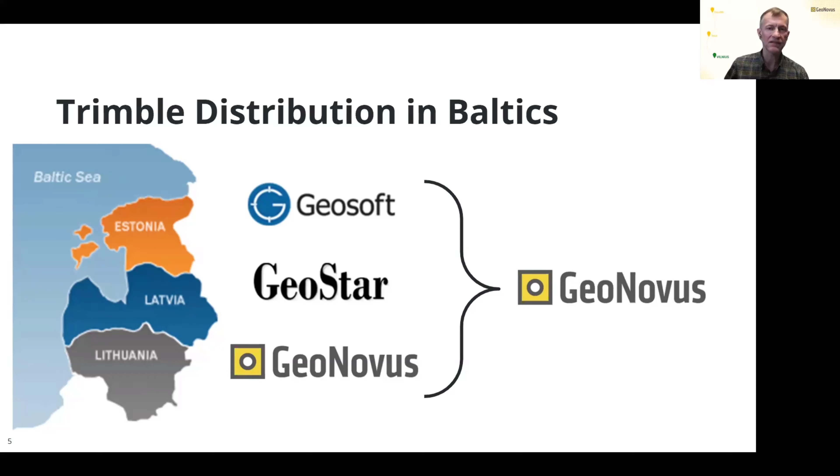And our main mission and role is to distribute and support customers related to the Trimble products, and many customers already know that the main products are GNSS receivers, total stations, classical optical, digital levels, various 3D scanning solutions like Trimble X9, which is used on a tripod, also MX60, which we can put on the train. For example, Latvian railways are using that, or some mobile mapping solutions which are also used in Baltics. So various 3D scanning solutions.

About the monitoring solutions we will be talking today. Christian will help with that. Photogrammetry solutions. Also, we have Trimble Business Center, Trimble UAS Master, some Pix4D products for that. Also drones, various UAS solutions. And in all three countries, we have Trimble repair centers, if somebody needs help to adjust, to fix, to solve various issues for all Trimble products. So in all three countries, we have three repair centers.

And if there is a need, we have various products for rental and can do some projects together with our customers. So generally, from my side, that's it.

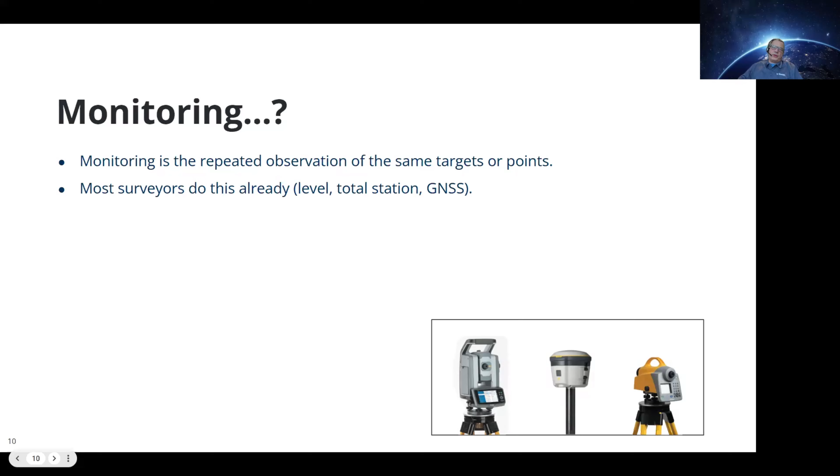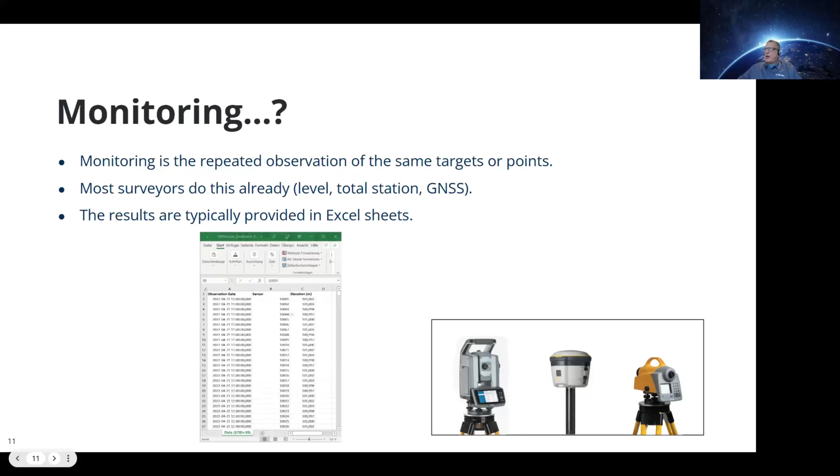And most surveyors and other engineering offices, you're doing it today. You are using your survey equipment to take observations to prisms. You do level runs once a week, once a day, to observe whether there is settlement. So it's nothing really new to you. And I'm pretty sure that most of the people in the call have been doing some monitoring or deformation measurements in the past. And typically, you create the results of each observation, and then you put it, for example, in an Excel spreadsheet. And then you show that Excel spreadsheet, or maybe you add some graphs in there, and then you provide it to your clients.

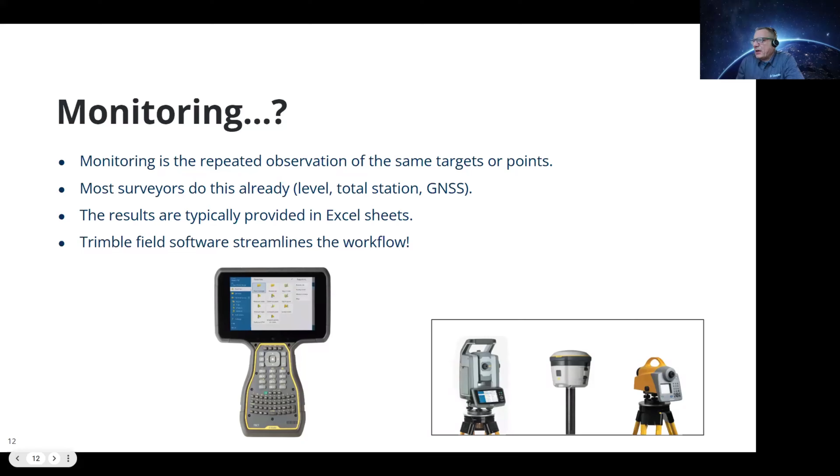The good thing is that Trimble has a lot of tools, little ones and more complex ones, that allow you to make this whole workflow a lot easier. And that is what we are talking about. There's special field software tools that you can use. There's special office software that you can use to streamline your workflows. And again, what I want to say is getting started with monitoring is very easy.

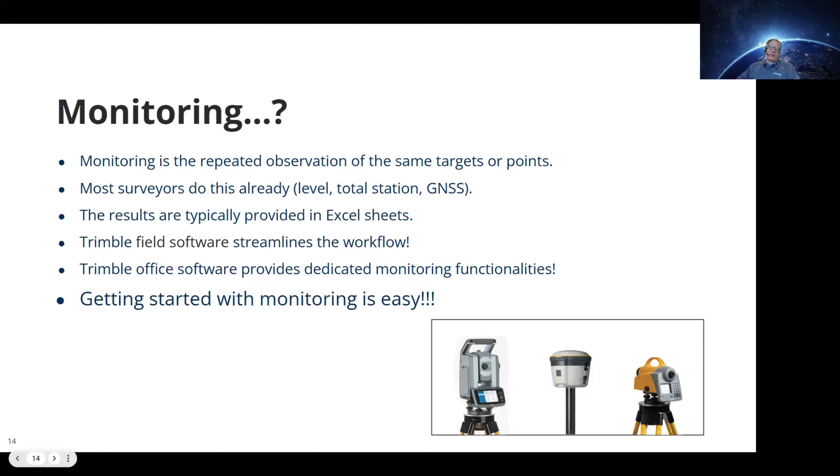While we are talking about standard survey equipment, I want to start with showing how to improve your workflows using a total station. But before so, we want to look also into specific applications where monitoring is being used today. I don't want to do a deep dive into that, just to highlight where this technology can be applied. And in the end, the idea is to provide you with new opportunities where you can provide your professional services to others.

And when it comes to monitoring, immediately we are talking about monitoring of structures, and in this case here, transportation infrastructure. That can be rails, that can be roads, that can be canals. You might have a canal or a dam where there are ship locks that you need to monitor. That's done frequently by our clients in other regions.

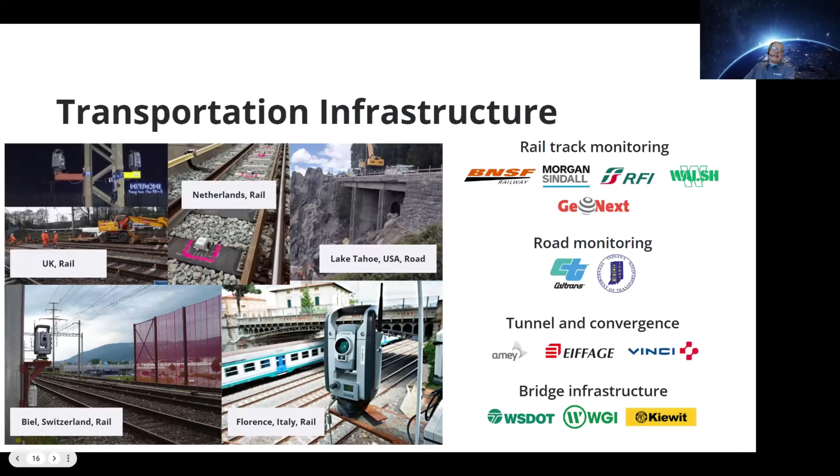Rail is a very hot topic, because there are many infrastructure projects going on in Europe. There is since many years the plan to connect the major cities in Europe with new railway lines, and mostly these new railway lines are being constructed in corridors that already exist, in parallel to existing railway lines, and then of course monitoring of the existing infrastructure is required.

Another thing is buildings. Whenever you have historic buildings, for example, and there is construction going on, and you want to make sure that the historic buildings or other buildings adjacent to construction sites are safe, then in many cases it's already today compulsory to set up a monitoring system. Because in the end, when something happens and the construction is affecting buildings next to the construction, you need to prove: is the damage related to the construction, or was it there before? And what is the extent of the movement?

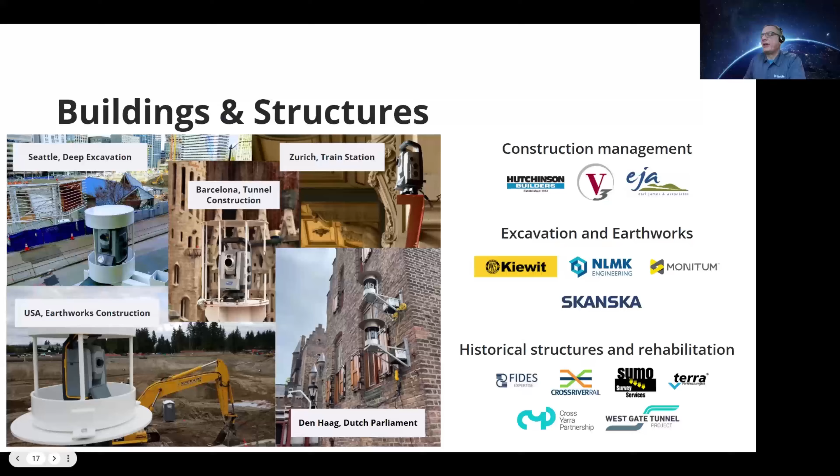And of course, it is a safety equipment in case there is movement. Then you can react. You can immediately say, okay, stop working at that site, because now something is happening to the structures around it.

Another big topic, maybe less important in the Baltic region, is mining. There are a lot of open pit mines in the world that are using the Trimble technology to monitor their pits, the pit walls, but also structures which are adjacent to pits, and this is basically dams, because a lot of the mines are producing a lot of wastewater and they store it in dams, and they need to monitor these dams, of course.

But also other dams are being monitored. At least a dam of a certain size that is a potential hazard to the people living next to it has to be monitored. I'm pretty sure that most of the dams in the world already have some basic monitoring systems. You do level runs on the dam crest once a year, twice a year, probably twice a year, when the water level is high or when the water level is low. So a summer observation and a winter observation.

But also there are other sensors in the dam itself that are being used to monitor, and we can help to modernize, of course, these existing installations, because the dams that we are looking at, most of the dams in Europe, are pretty old. They have some basic monitoring systems, but with the technology of today, they can easily be automated and extended.

All right, using our survey equipment for monitoring applications. As I said, I'm pretty sure that a lot of people have already been doing this, and that is why I would start with an example which is very basic, but nevertheless, it is important. Let's start with manual data collection, and let's assume that you have your total station and you already have a field controller of some sort. So this can be the TSC7 or any other controller running the Trimble Access survey software.

When you look at this example here, that's a construction pit. I like the picture because it's a deep one. But that is nothing very special. We see this with a lot of metro construction projects in the world. You have a deep excavation in the city center, and you need to monitor the excavation pit itself, but also the buildings around. So what can you do by using the technology that you already have in your hands today?

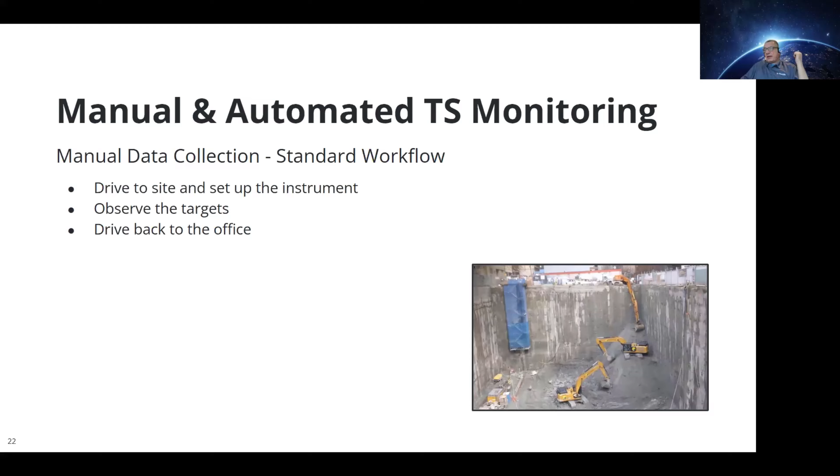What you would do is drive to the site, set up your instrument, and once it is set up, you observe the targets. Once you've observed the targets, you go back to the office to process the data or use the results, and create that famous Excel sheet that I mentioned initially. Once that Excel sheet is done, you maybe make it up a little bit by adding some graphs in Excel, and then you provide these results to your client. After some time, you go back to the site and repeat the same story again and again. So that is a standard workflow.

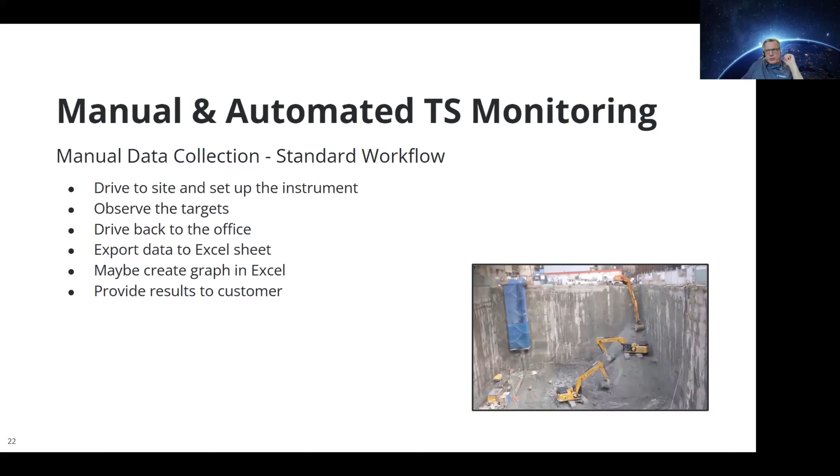And if you just need to do this once a week, or once every second week, that is a proper workflow. You don't need to have an automated system for every single site. But you can still improve the workflow on site with little tools. One little tool is the so-called Trimble Access monitoring application. It's a little add-on that you can put on your controller, an add-on to the Trimble Access survey software, and that little tool already improves the workflow on site a lot.

Of course, you still need to drive to the site and set up the instrument. That will always be the case. But then the instrument observes all targets automatically; you don't need to do this manually. Once you have observed all the targets in the field directly, you can create the report on it.

So you can output the values, and you can output graphs for the movement over the observed periods. And then you can immediately in the field provide these reports to your client in a PDF, in an Excel sheet, or even in a Word document if you want to do so. And then, of course, you can easily go to the next site and do your next job.

All right. That is a pretty straightforward workflow, and it reduces the amount of time on site. If you have multiple jobs, or if this is a long-term project, or if you want to bring in observations from other instruments, you can also use a little add-on which is made for the Trimble Business Center software.

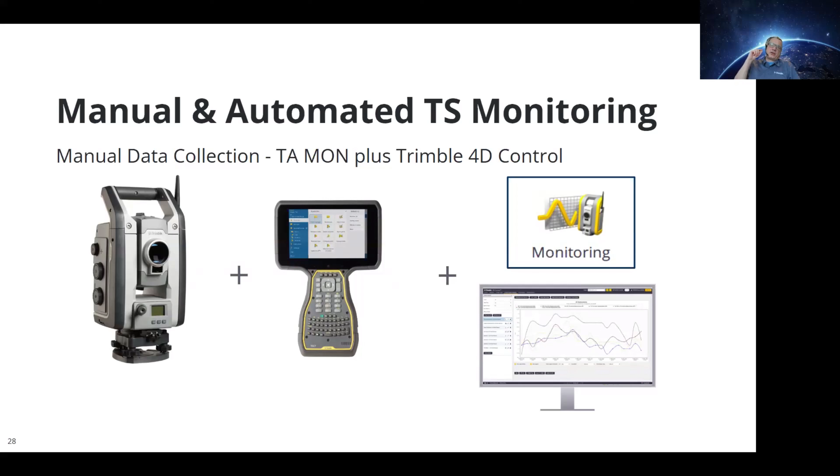You still, of course, need to go to the site, set up the instrument, and observe the targets. You sync the data with the office, but then the T4D software, Trimble 4D Control software, manages the data. It will process the data automatically. It will automatically create the reports, and it will provide the results to your client.

So T4D, I will show you in a minute, can create reports automatically according to a schedule that you set up, but it also provides a web user interface that you can share with your clients. So if you want your client to look at the data by himself, you can set up access for your client, and you don't even need to send the reports, because every time the client wants to see an updated result, he can go and check that result by himself.

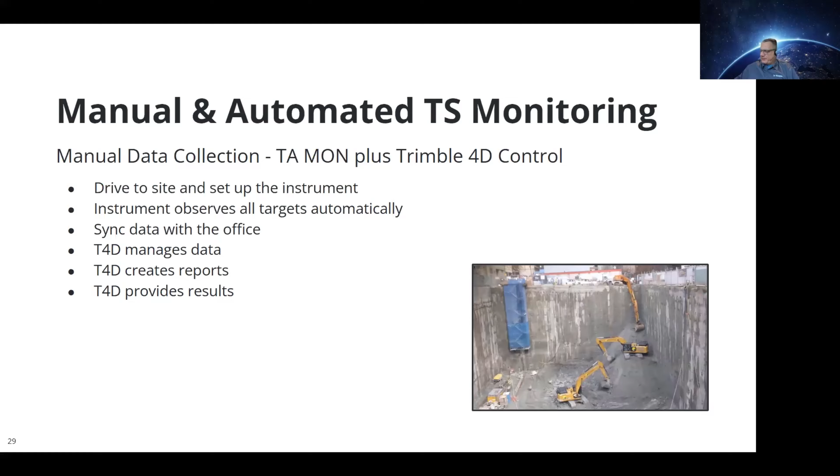Okay, now we have been looking at manual data collection, and I don't think that is a big problem for anyone here on the call. But let's assume you now see that there is movement, and you need to increase the observation frequency. Then it makes sense to automate the system. And the good thing is, all the data that you have already collected manually, which is in T4D, in Trimble 4D Control, you can still use it.

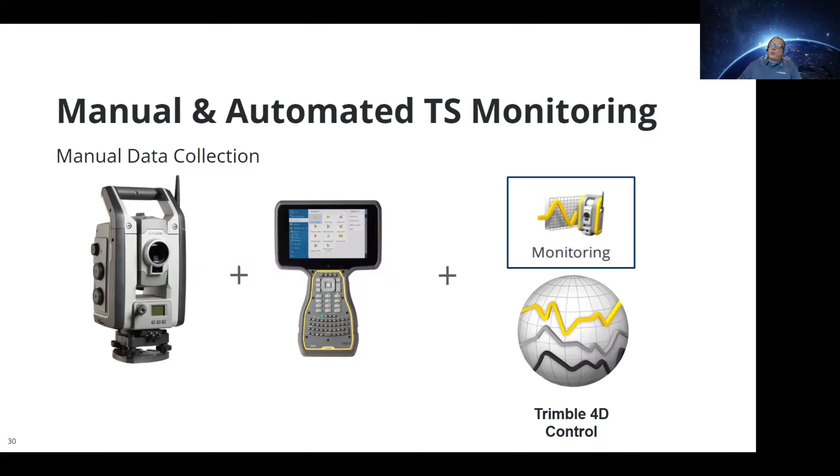And what it does first, it operates the instrument autonomously. So you can use that device to set up a schedule for your observations. And according to the schedule you set up, the instrument will observe the targets. The observations will be transferred directly to the Trimble 4D Control monitoring software.

And if there is an interruption in the internet connection, for example, because this works via internet, the data will be stored locally, and once the connection is back, the Trimble 4D Control software will pick the data and will reprocess it subsequently, so that you don't have any gaps in your monitoring data.

It also provides power to the instrument. So you just need one power supply, either mains or a car battery which is charged by solar, or whatever power supply you have available. So there's just one cable that goes from that box here to the total station, and it also checks, of course, the total station, whether it is operating properly or not, and it will give you the information that everything is all right, or it will send you an alarm in case something is happening.

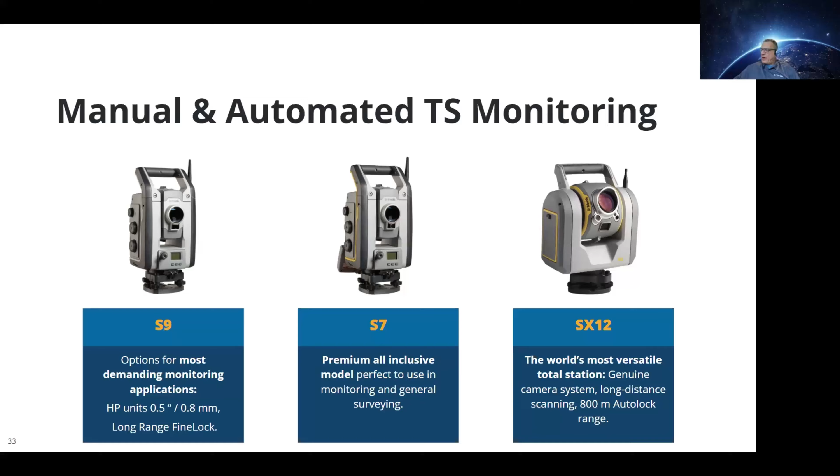And it's equipped with an S9 high precision total station, Settop M1, and it observes every hour 4 times each of the targets. That means 6 reference points and 16 observation points. With data transmission, the real-time accuracy is around 1 millimeter. And it has now been working more than 2 years in the field. Yeah, this is the first installation and it works quite successfully. Okay, thank you for this.

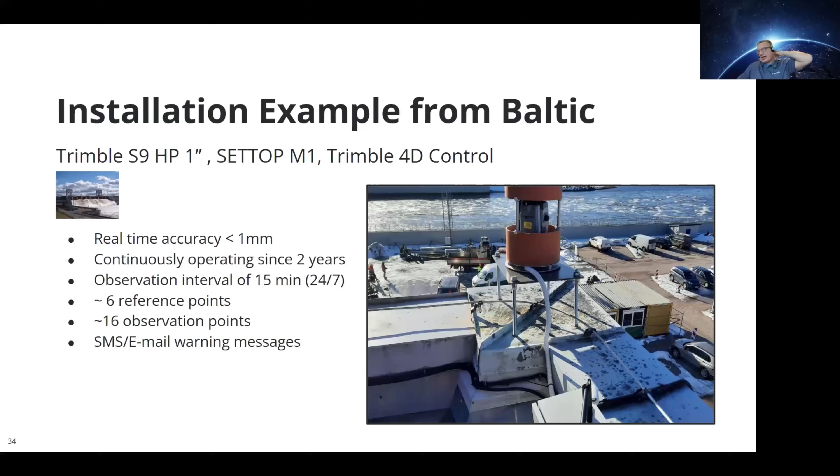All right. The client is very happy with that installation, and because of that, he's now considering adding additional sensors, additional devices to monitor additional parts of that structure. And when we talk about additional monitoring sensors, we can immediately think of the sensors that we are familiar with. And when we are talking about additional survey sensors, of course, we first look at GNSS.

And GNSS, of course, brings a lot of advantages to a monitoring site, because with GNSS it is possible to monitor at very high frequency. As Maris just said, in that monitoring project in Latvia, we are observing the targets every 15 minutes. With GNSS, as you can imagine, we can create much higher frequencies. We can have, for example, a result every second. If we have a more dynamic application where we expect sudden movement, then of course using GNSS technology is the right choice here.

Of course, the drawback is that you cannot observe so many targets with a single setup. You need multiple receivers. In order to observe multiple points, you need the equivalent amount of receivers. Of course, there is one model that we have here that is a dual board, on the right hand side. If you have 2 points that are pretty close to each other, let's say 10, 15, 20 meters, or 50 meters, you can use that dual board receiver, which is also supported by the Trimble monitoring software, and that allows you to monitor 2 points at a very high frequency.

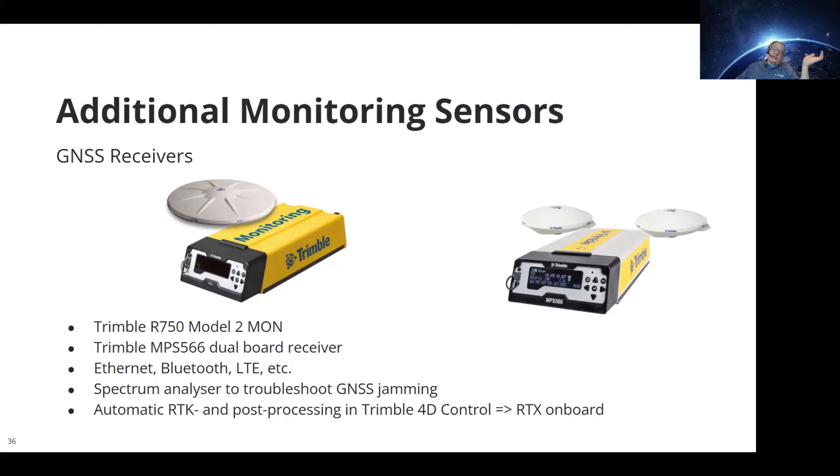Then, before going forward, maybe you see in the Q&A chat one question, and you could answer live to that. Okay. So there's a question in the chat here.

I saw a total station on a metal plate in Maris's pictures. Does it also have position changes due to temperature, sun, and other factors? Yes, this can happen, of course. If you are not sure whether your total station is actually at a stable position, the software allows you to use the total station in a resection. That means you can monitor the position of your total station and see whether there is an influence in the position of the total station.

Generally, when we are doing monitoring using total stations, we always use temperature correction and pressure correction. The SETTOP M1 always comes with an external temperature sensor that allows you to measure the air temperature, and all of the instruments that I showed have an internal barometer. It measures the air pressure, and these are used to calculate corrections for the EDM. The software has additional tools to do atmospheric corrections by using reference targets.

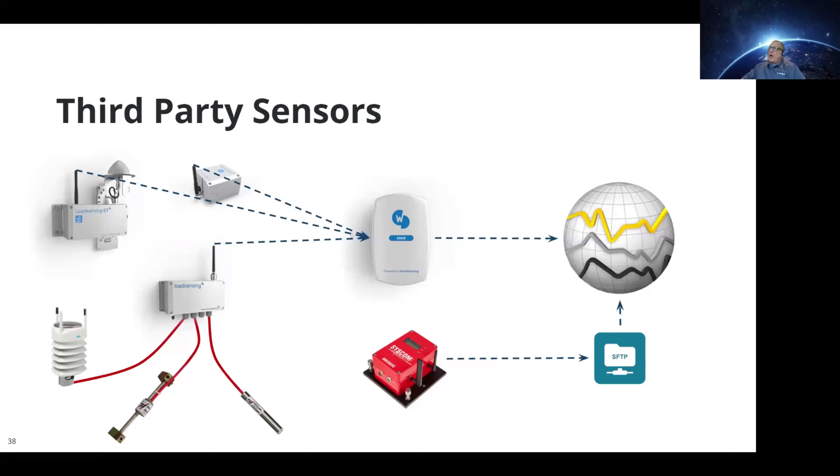What I'd like to explain a little bit more about these sensors: first it is necessary to study in great detail what you really need, and what accuracy is requested. Some sensors give you very good relative accuracy, but for these geotechnical sensors there sometimes exists a drift of the zero point, and you need a long time to recognize how this zero point is moving, on which scale, and how it is affected by temperature, pressure, sunshine or climatic periods.

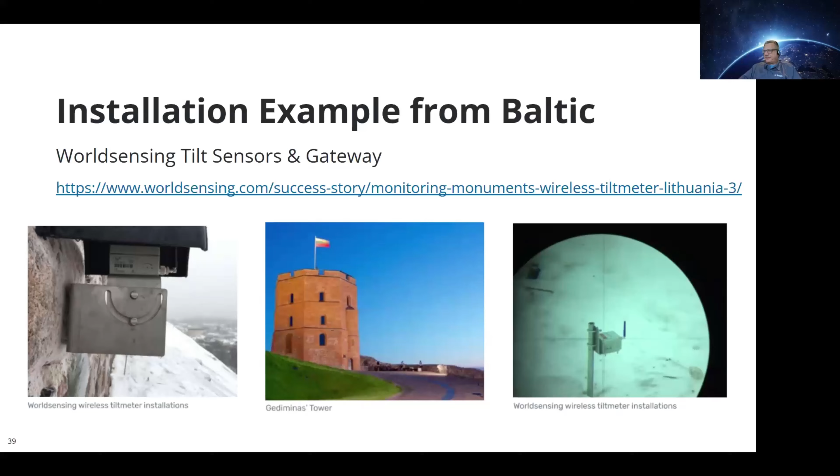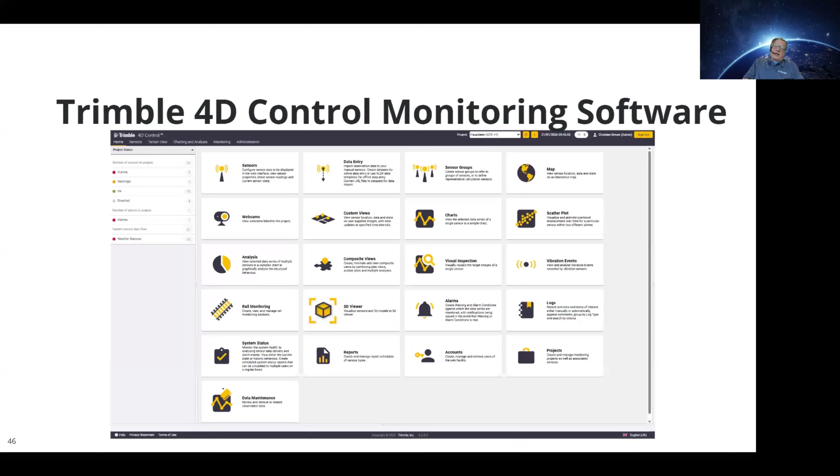Of course, you have a section that allows you to do account management, because you can actually grant access to others, but you want to make sure that these people only see what you want them to see. So you can create very specific account and access levels. Naturally, you would expect a map view. By default you can use OpenStreetMap, and if you have a key for Google or Bing, you can also use Bing and Google Maps.

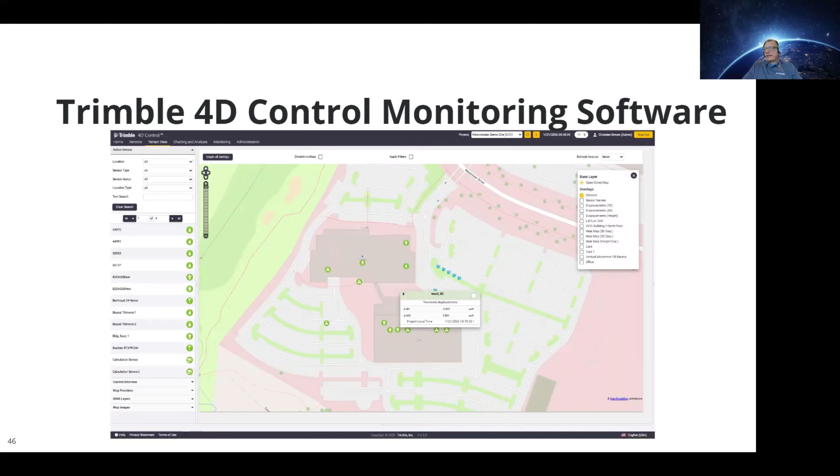You can also create your own geo-referenced maps, load them into the software and use your geo-referenced pictures as a backdrop image. You can even bring in your own web map server. Many authorities have their own maps, cadastral maps or maps of many different sorts, which you can access, and then you can integrate that map server here.

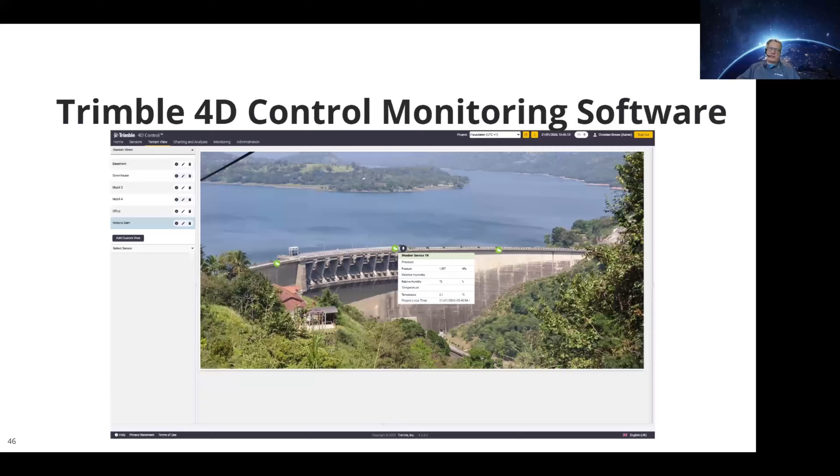You can also simply take a picture with your mobile phone that shows the site, and then you move the sensors to the location so that others can see the position in the real world, and you can overlay the readings of the sensors, graphing and so on.

You can create your own dashboard by putting different graphs together on one side and make this dashboard accessible to others without creating an account. You can publish it to the outside world, basically in front of the login of the web UI. And visualizing the data also is a personal thing.

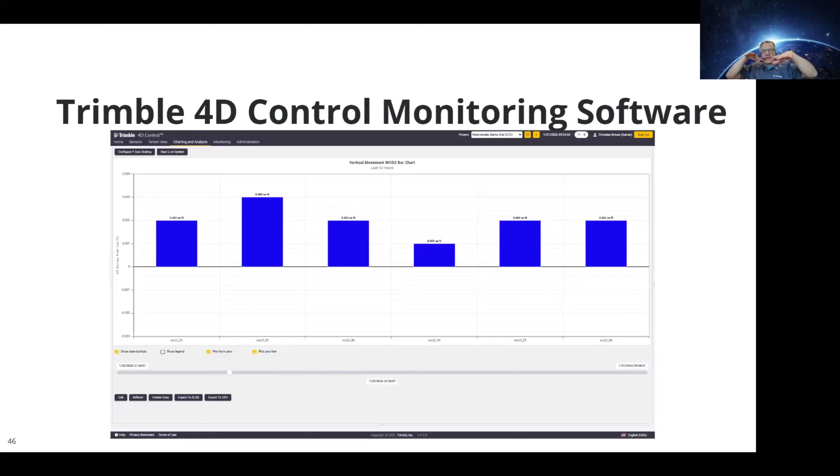Some people prefer to use it, to see the data in this way or that way. This is an example of a bar chart where you can then monitor the different height changes at points that you have been leveling, for example.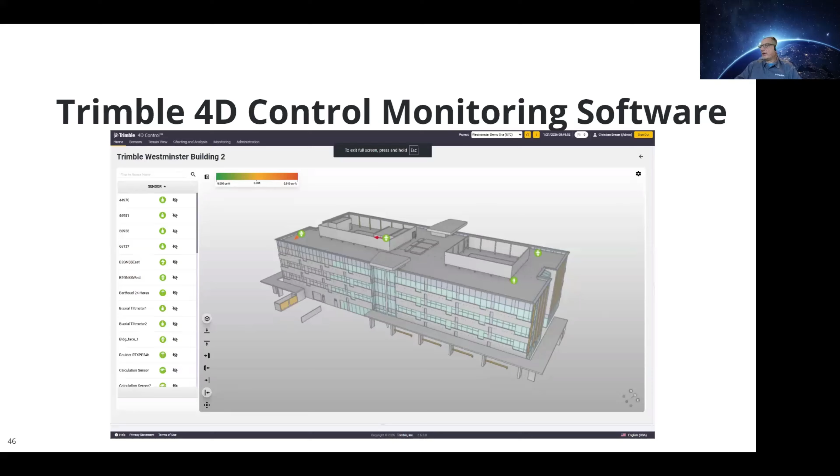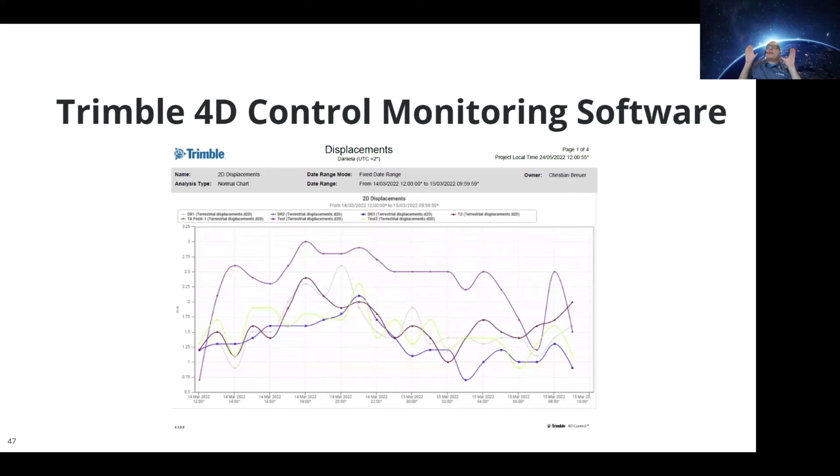And what is, for 90% of the users, the most important stuff is you can set up automated reporting, so that every Monday morning at 9 o'clock, for example, you get an automated email with a PDF file that gives you an overview of what happened during the course of the week. It gives you, for example, a chart that shows the behavior of the sensors, the behavior of the structure over the last week, and you don't even need to touch it if you want to.

And worth mentioning here is one thing for Trimble 4D Control. You can also have a dedicated rail module. Why is that? Number one, there are a lot of railway projects going on. There is a lot of construction going on at existing railways, and many of our installations are being used to monitor rail tracks.

The total station or a tilt sensor will provide you displacement or tilt or inclination of the rails. But most of the survey authorities are not interested in 3D displacement of a rail. They want to see the results relative to the actual railway geometry.

This T4D rail module allows you to upload a file which contains the railway geometry, and then when you observe the targets on the rails, or if you bring in a tilt sensor and place it on the rail, it will automatically calculate the values which are required by the rail authorities. Meaning, it will take the rail geometry and calculate all these values here that you can see.

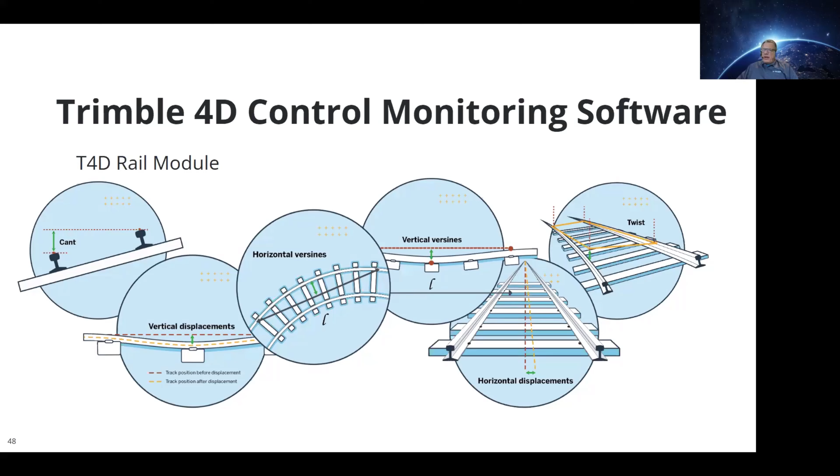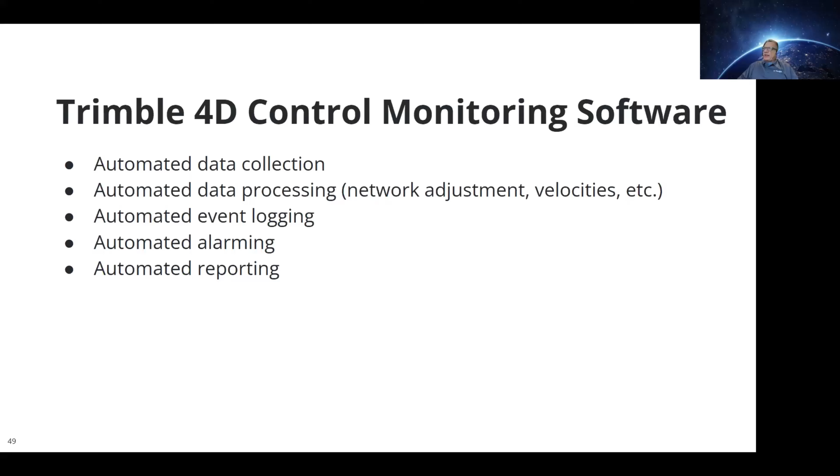Having said that, I think that was one of my last slides. That is actually the one just summarizing the capabilities of T4D. So if you want to, it can do everything automatically. If you want to work with it and bring in manual data, no problem at all. The big benefit is that you can provide the data to your clients immediately, and you are always up to date.